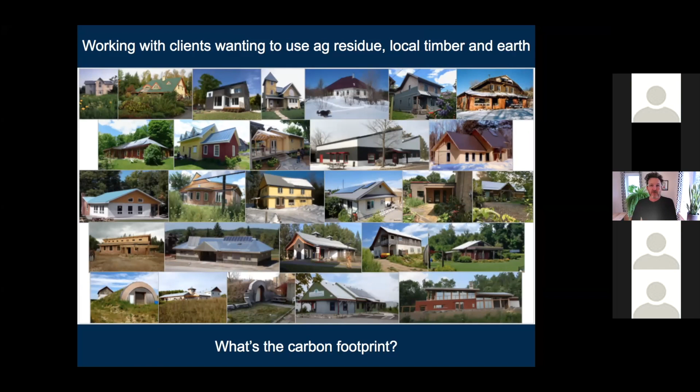So I have a 25-year career in designing and building using a lot of ag residues, timber, and earthen materials, and have had a chance to work with all kinds of really interesting residential, commercial, and institutional building owners really trying to think seriously about the environmental impact of their buildings. But for a lot of that career, what's the actual carbon footprint of what we're doing wasn't a question we were directly asking.

In the building sector, we have been putting all of our focus onto the emissions that come from building operations, and for good reason, they make up a pretty high percentage of the planet's overall carbon emissions. But we have, as an industry, completely missed the material emissions. It's only within the last couple of years that this has started to get any serious consideration within the industry. And as people started trying to do the math on what all the production of building materials adds up to, it's pretty significant - somewhere in the neighborhood of 20% of all emissions on the planet come from making building materials.

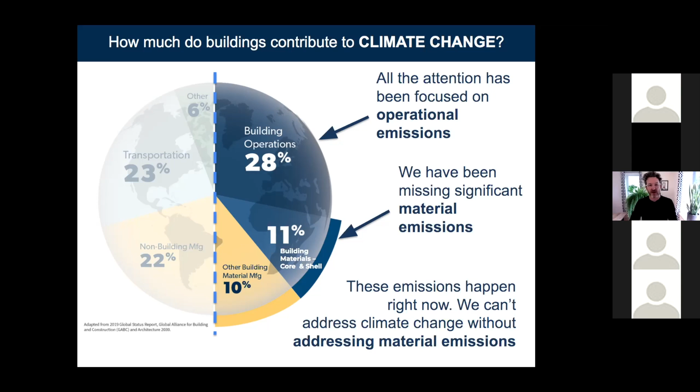The important thing to remember when we are emitting by making building materials is that we're emitting all the carbon footprint of that building at the beginning of its lifespan. With building operations, we can clean up energy sources, retrofit buildings, and work to reduce the ongoing operating emissions, but we can't make much impact on materials that have already been made. So there's this upfront piece that, even though it's maybe not quite as big a slice of the pie globally, it happens now, and we have to tackle it now.

So a lot of the initial work I did is in the residential building space - I'm looking at anything from small multi-unit buildings, four stories and under, down to single family homes. In my work looking at the Canadian and American context for those buildings, it's pretty typical for a home to have emissions of about 250 kilograms of CO2e per square meter of floor area.

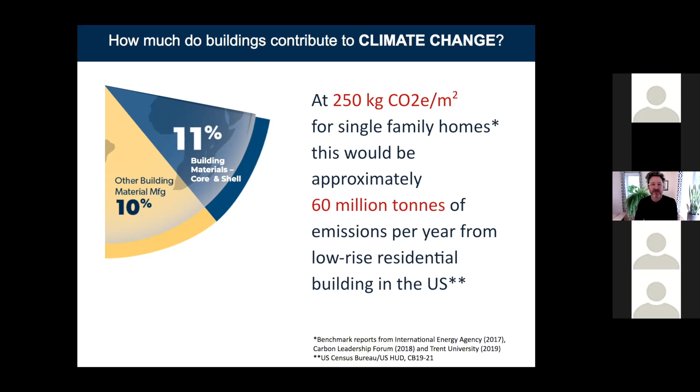What that means is that the annual share of emissions from making the materials for American single-family homes is about 60 million tons. So this is not a trifling amount of emissions, and we really need to think about what that means. It's the equivalent of a year's worth of emissions from 14.6 million cars or 30 to 40 coal plants. All of that happens annually. And as incentives now, both in Canada and the US, start arriving to build more homes, these numbers are only going to go up unless we do something about it.

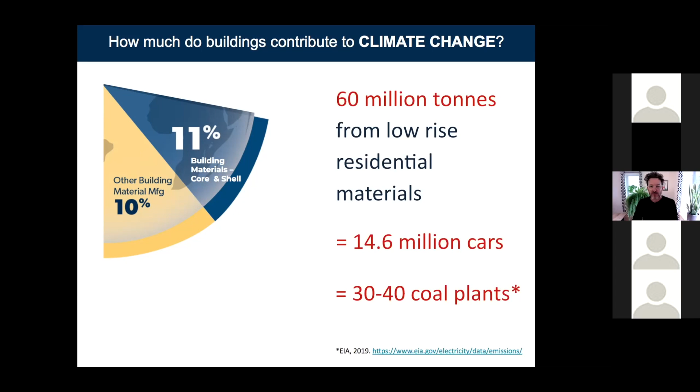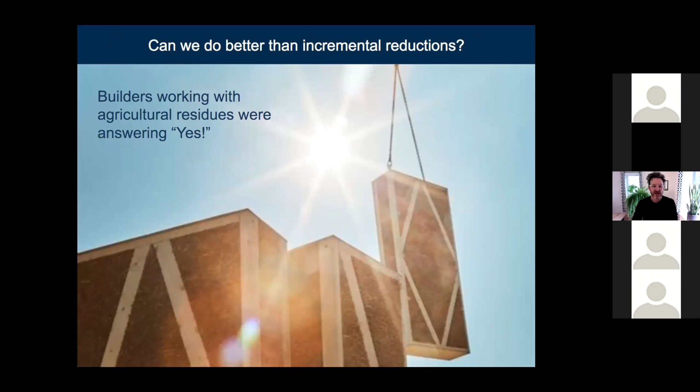So, the question is, can we actually do better than that. And from my career and from the career of lots of people, in particular, who've been building with agricultural residues, we do believe that there is a really strong way to be able to address that.

My initial study looked at a couple of housing types, a small apartment building and a single family home. If we took the exact same building, the same performance specs, the same code compliance, all of those things normalized, and just switched out materials, we saw there was this huge range of potential impacts on the climate from that building.

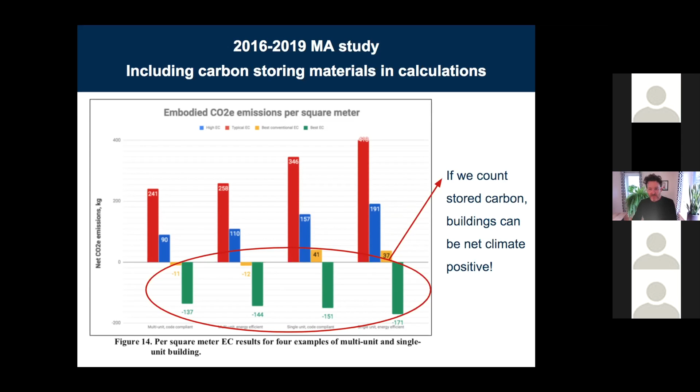But really encouraging to see that there is a pathway to outcomes where buildings don't only do slightly less bad for the climate, where we can actually see buildings as a CDR opportunity.

So there's really two ways that we can put carbon into buildings: one is through photosynthesis, and one is through carbonate mineralization. I'll look quickly at both, but the majority of the presentation today is going to be looking at the photosynthetic options, simply because there are more of them and they're more fully developed. Although I think the potential for carbonate mineralization is huge too.

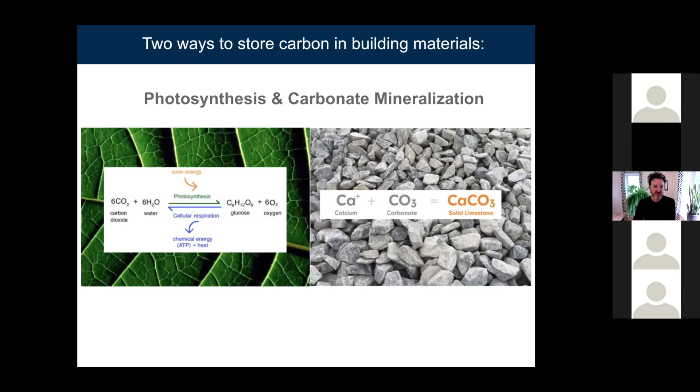So on that front, there are a few interesting things going on right now. The manufacturing of concrete, in particular Portland cement, which is the glue that holds all the rocks and sand together in concrete, is alone responsible for somewhere around 8% of global emissions. So working to fix concrete in terms of its climate impact is really important.

A couple of really interesting pathways being explored now are biological forms of concrete, where we essentially use living organisms to grow concrete, whether they're microbes in the case of Biomason, or algae in the case of what's coming from Living Materials Lab, to use those organisms that draw carbon dioxide out of the atmosphere and turn it back into rock, essentially. So really interesting things going on there.

BioLith from Biomason is now available in tile and brick form, and hopefully coming soon as a ready mix form. So I would expect these developments to really move forward in the years to come.

The other thing that's really exciting in this space is aggregates made out of recaptured carbon. Whether it's Blue Planet making synthetic limestone aggregate, basically capturing CO2 from emission stacks and recarbonizing it into rocks that then become the aggregate portion of the concrete. OCO is doing the same, but using mining tailings and other industrial wastes that can be carbonated.

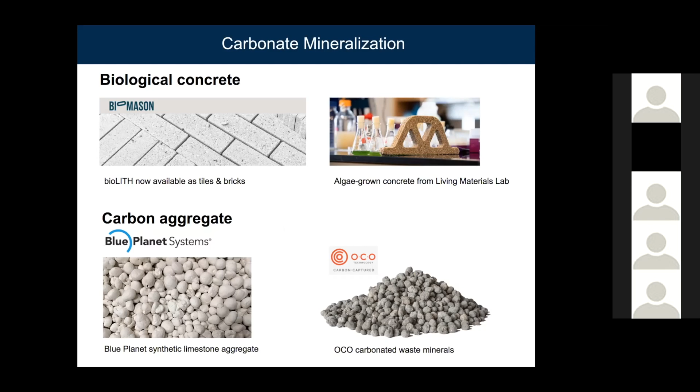What I'm going to be focused on are the photosynthetic versions. And we've taken to really thinking about them in four quite distinct categories, because I think each of these categories has its own methodology for figuring out what the value of that carbon storage is.

And the four categories would be agricultural residues. So that would include things like straw, bagasse, hemp hurd, rice hulls, seaweed, corn stover, nutshells. There's a huge range of things that we already grow on the planet. We grow food to eat, and almost everything we grow has a pretty significant proportion of residue involved. And those residues are carbon that was captured out of the atmosphere within the last year for most agricultural products.

And so offers a huge potential for putting that away instead of burning it or rotting it and having it go back into the atmosphere.

And then there's also waste stream fibers, things that are in our recycling systems now, or that can or should be, things like paper, cardboard, textiles, and there are all kinds of products already underway from that line. Then there are some purpose-grown crops, and here the carbon storage math gets a little trickier because we have to attribute the full scale of all the carbon emissions that happen to grow these crops to the material. Most of the ones I've looked at still tend to offer net carbon storage, but one thing we want to make sure of, in promoting photosynthetic materials for buildings, is that we don't end up displacing croplands or cutting down forests in order to purpose-grow building materials. So there's a bit more nuance involved as we explore purpose-grown crops.

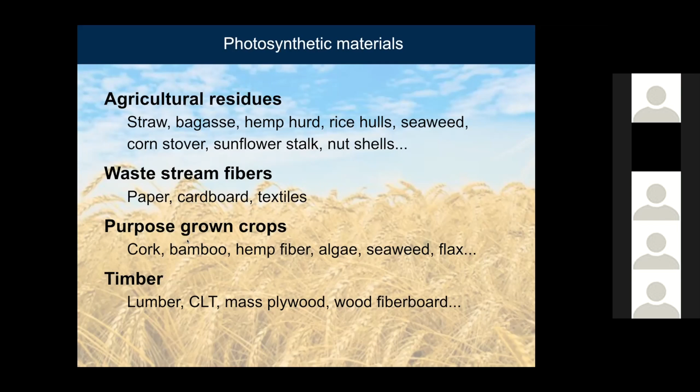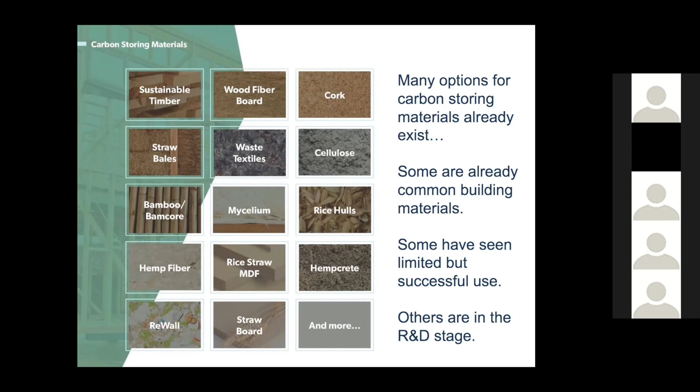So like I said, there are all kinds of photosynthetic-based materials out there. Some have been typical in the building industry for a really long time. Some are quite new, some are just at the R&D stage, some have been used for decades but aren't part of mainstream construction. But the variety of options is vast. We've been building out a database of carbon storing materials with Builders for Climate Action, and right now we're at about 130 different products already available for use in buildings. Not all of these are upfront and visible to everybody, but there's a lot of different options out there.

I'll just point to grain straw as one example, from the world of ag residues there are many different examples. You can see how much grain straw is grown annually. We eat the wheat, the oats or the barley off the top of that plant, and the stalk is left over. Essentially the global grain production every year results in 4 billion tons of CO2 drawdown into that straw. That's the equivalent of all the greenhouse gases from India.

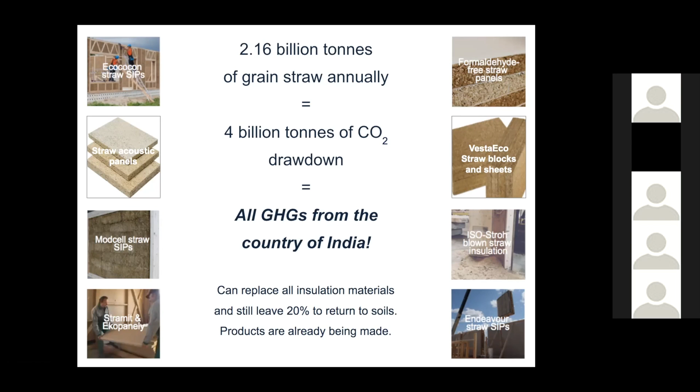And by and large, we just let all of that carbon go back into the atmosphere. But we could replace every insulation material being used on the planet with just straw-based insulation materials, and still leave the 20% of the straw harvest that needs to go back into the soil to keep it healthy. Around the world, there are all kinds of straw products already being made and used and implemented. So this is just one look at one way that one type of ag residue is being used, and we can multiply that by the literally hundreds of different options that are out there.

I'm going to go through this fairly quickly, but what I'd like to do is look at the life cycle phase of typical construction materials. So I'm mapping that here in red, where the harvesting, the manufacturing, the transportation, the construction, all result in emissions happening - discharges to the atmosphere, whether from fossil fuels being used in those processes, chemical reactions happening in those processes, transportation, fuel use for heating, all those sorts of things. They all add up to a bunch of emissions, which means that, for the lifespan of a building, that building is already responsible for that many emissions when it's built. And of course, those emissions stay in the atmosphere and continue to drive climate change.

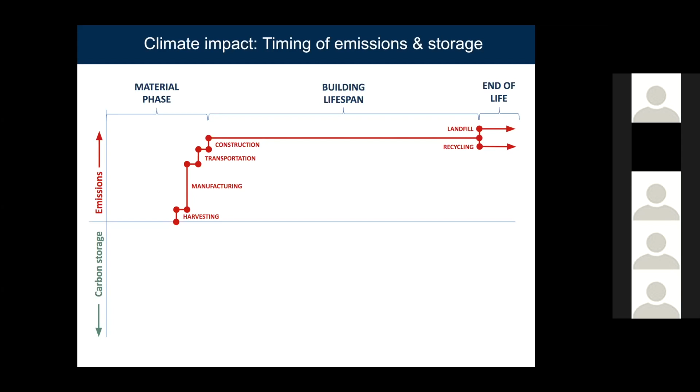At the end of that building's life, if we're able to recycle some of that material, we may offset some future emissions.

But we may end up landfilling or incinerating that and causing more emissions. The thing that's important to remember is that it's not the number at the end of that lifespan that matters, it's the area under the red line. Once the emissions go into the atmosphere, they're there driving climate change. So when we think about the impacts of materials, we have to see it as cumulative over the lifespan of the building.

With photosynthetic materials, we usually have a small burst of emissions when those are planted, then a period of photosynthetic drawdown while that plant is growing. The time frame on that could be a few months for something like wheat straw to many decades for a tree. Then we have the same set of emissions: harvesting, manufacturing, transportation, construction all put emissions back into the atmosphere. But for every material I've mapped out so far, those emissions are less than the amount of CO2 that was drawn down as the plant was growing.

So when we bundle that up and put it in a building for 40 years, 60 years, 80 years, 100 years, whatever that building lives to be, that's a net removal of CO2 from the atmosphere for that period of time. The meaningful carbon storage is the area above the line. It matters that carbon is gone and gone for quite some space of time. The difference between building with conventional materials and biologically based materials is the difference between that red line and the green line. There's a real impact we can make by focusing on this.

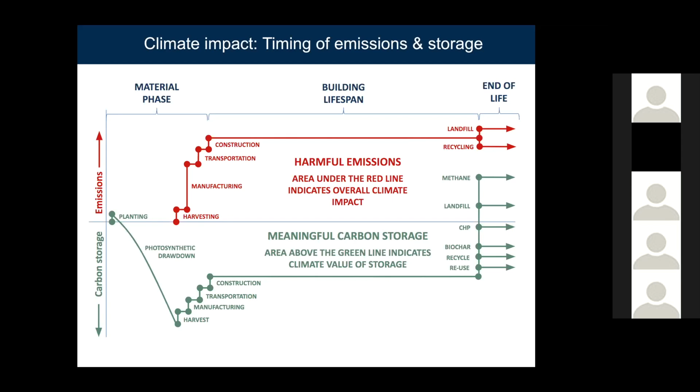So as I've started to take this notion of carbon storage in building materials to climate scientists, asking what does this mean, how do we view this kind of carbon storage that is temporary, but measured in decades or a century versus temporary as in a year or two or under a decade, I've been turned towards this notion of ton-year accounting. Essentially, the pulse of 1 ton of CO2 has an impact in the atmosphere over 100 years of 46 ton-years of damage. That means if we can store a ton of carbon instead of emitting that ton for at least 46 years, then we've done the same as not emitting that pulse in the first place.

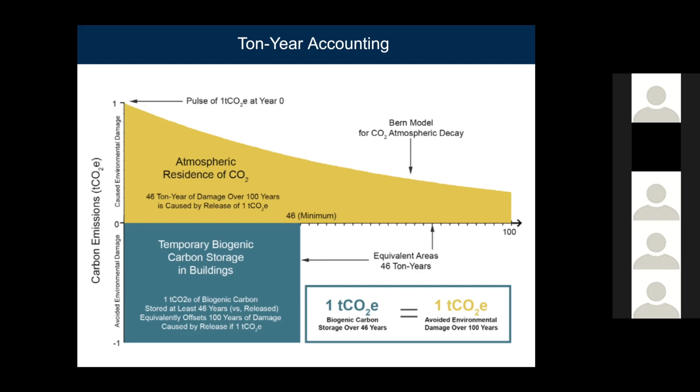So when the area of the yellow section and the area of the green section are equal, you've done equal work in terms of the impact on the climate. And because buildings do have, even in the short version of their lifespans where we're sometimes attributing only 40 years or so, that's getting really close to the full value of carbon storage. So what that means is when that carbon comes out of the building, if it goes back to the atmosphere, it's a new emission, and that's problematic, and we should make sure that doesn't happen. But it's done its work as an offset of an emission over that period of time.

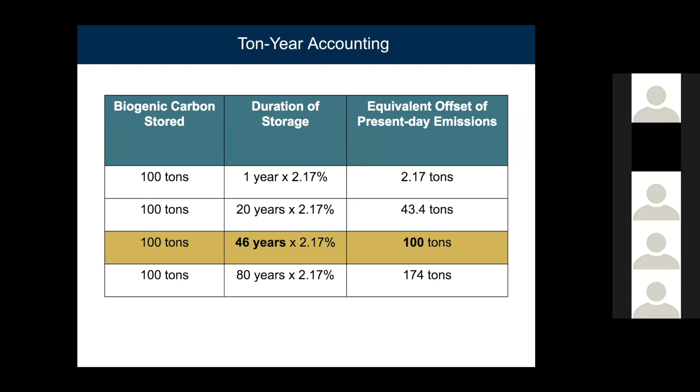So that's kind of the rationale that we're using. And there are some carbon markets starting to be set up, in particular to sell storage in buildings. Aureus Earth is a great example of that.

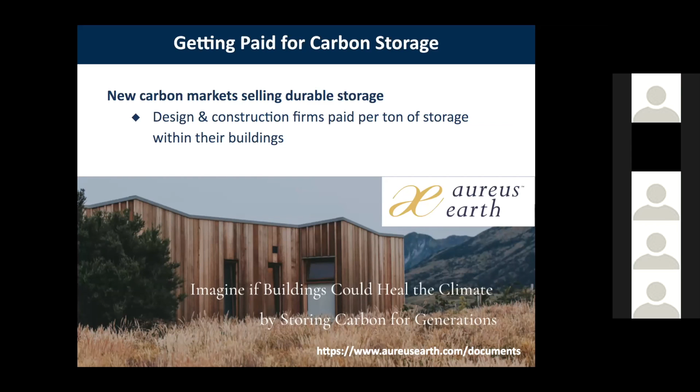They just put out a really great white paper on their methodology, so if you're interested in the actual market value of this, you could check that out.

One thing I like to point out from my previous practice is that I really want to make sure that in trying to do the right thing for the climate, I'm not doing the wrong thing in other ways, that there aren't unintended consequences. With these photosynthetic materials, I found the opposite, that when I looked at other metrics by which we can measure impact, the biological materials are actually a lot better overall than their conventional counterparts.

None of the photosynthetic materials that I looked at in my study, or that we use in our own practice, have any red list chemicals in them, which means great for the occupants of the building to not be exposed to any toxins, and great for the environment to not have those things created in the first place or have waste that reintroduces them.

There are many more opportunities for getting these products sourced locally, whether through agricultural byproducts, forestry residues, or municipal recycling programs, and regional manufacturing becomes a lot more attractive. A lot of these materials aren't very expensive and can be turned into products quite easily, and that actually works better at a smaller, more regional scale. So the potential for investments in smaller and rural areas where the materials are being generated really exists.

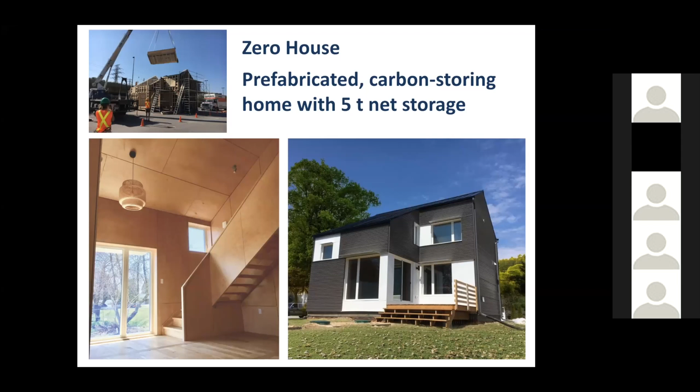So if we can start to think about not only using carbon storing materials, but using them in a way where you can dismantle the pieces and use them either as a whole again, or take the pieces and use them in different forms, that means we extend the lifespan of that carbon.

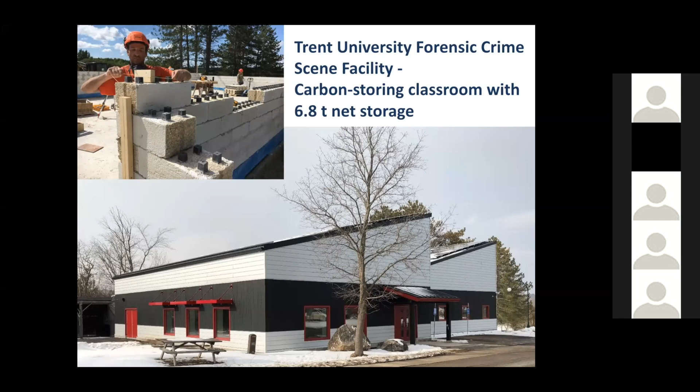We also recently were on the team that made the new forensic crime scene facility at Trent University here in Ontario. This 4,500 square foot building ended up with just under 7 tons of net storage in it, based largely on some of the hemp-based materials we used, the hemp blocks you can see in the photo, as well as hemp batt insulation and a number of other biological materials included in that building.

I wanted to show you this because that Trent building, we modeled it as it was going to be built at the university, and it was going to have over 211 tons of emissions associated with the materials. When we finished with the design, we calculated the footprint of the building in 2 ways.

One where we valued only the agricultural residues as carbon storage—in that case we reduced the carbon footprint by 88% and got it down to 25 tons. And if we included the timber, which we sourced from sustainable sources here in Ontario, that brought the net storage down to just under 7 tons.

So sometimes how you do the math and what you count makes a difference, but you can see even if we're not counting wood, there's a massive difference that can be made with materials that are available today and code compliant.

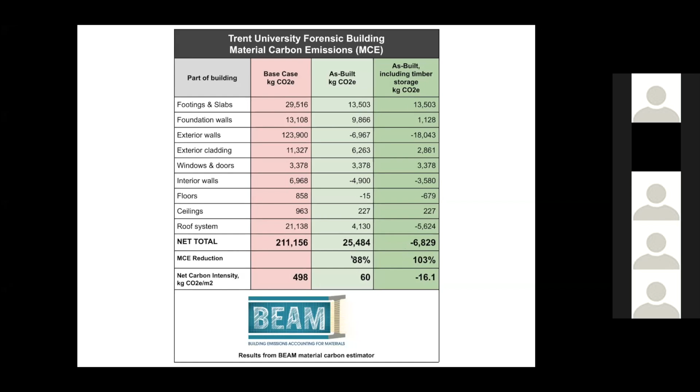And as is the case with a lot of climate stuff, the Europeans are way ahead of us in this. So there are, I'll just show you very quickly, a number of projects.

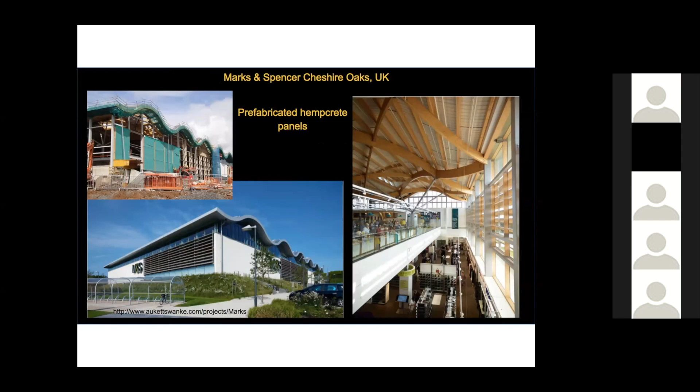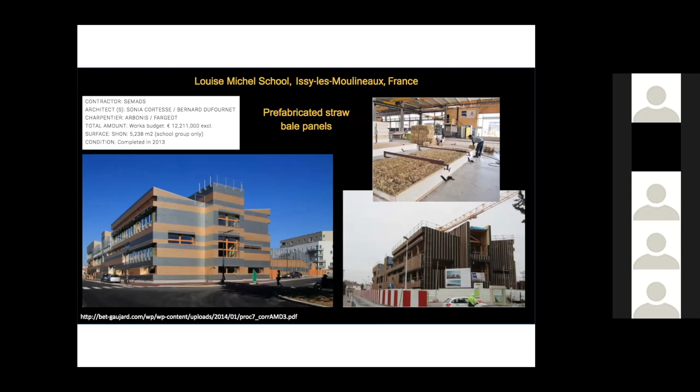So that's the presentation. I know if there are a lot of architects on the line, there may be a lot of questions about how you build with these materials and the details of them. I was trying to stick to the notion of carbon storage in buildings, but I'm happy to get into the weeds.

Just a quick note, if you go to buildersforclimateaction.org, we just put out this report with Natural Resources Canada, looking at this in the context of Canadian homes. So if you want to dive into a bunch of numbers and stats, it's a great report.

And somewhere along the line, my camera stopped working, Toby. So I'm not sure why I'm not appearing. When I go to the start video, it says you don't have a camera. I did when I started, but I didn't intentionally disappear.